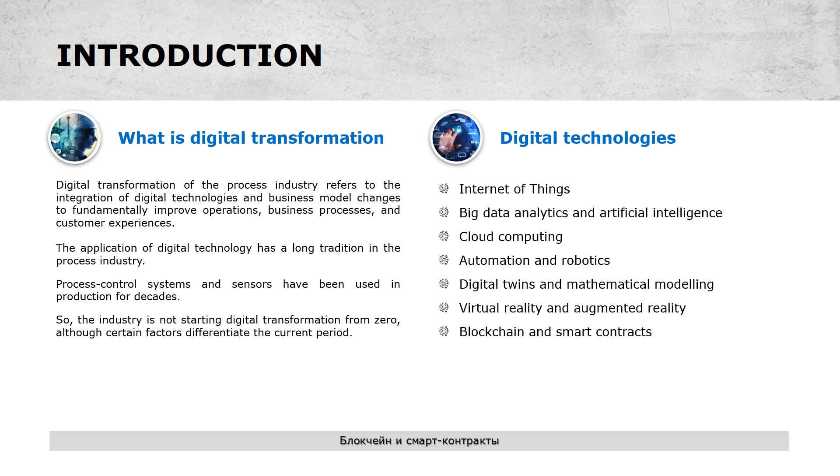Digital technologies: Internet of Things. The Internet of Things, IoT, is a set of sensors connected with a digital platform which are used to collect, transfer, and analyze raw data in real time to get a clear picture of processes at the facilities, improve operational efficiency, reduce energy consumption, and drive profitability.

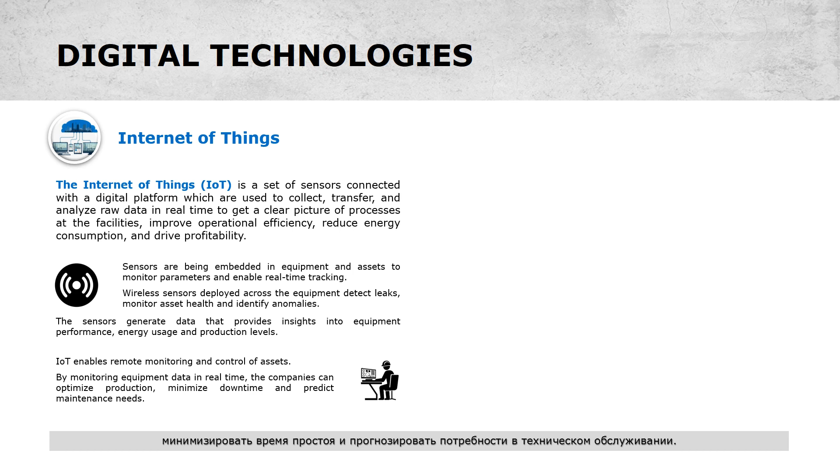Sensors are being embedded in equipment and assets to monitor parameters and enable real-time tracking. Wireless sensors deployed across the equipment detect leaks, monitor asset health, and identify anomalies. The sensors generate data that provides insights into equipment performance, energy usage, and production levels. IoT enables remote monitoring and control of assets. By monitoring equipment data in real time, companies can optimize production, minimize downtime, and predict maintenance needs.

Benefits of IoT. Real-time visibility: IoT provides a real-time view into equipment performance, safety, and environmental conditions, enabling companies to continuously monitor their facilities.

Predictive maintenance: the data from sensors installed at processing facilities enables predictive analytics and root cause analysis. They help identify pre-failure conditions and perform maintenance in advance to avoid major downtimes and ensure smooth operation and smarter utilization of assets.

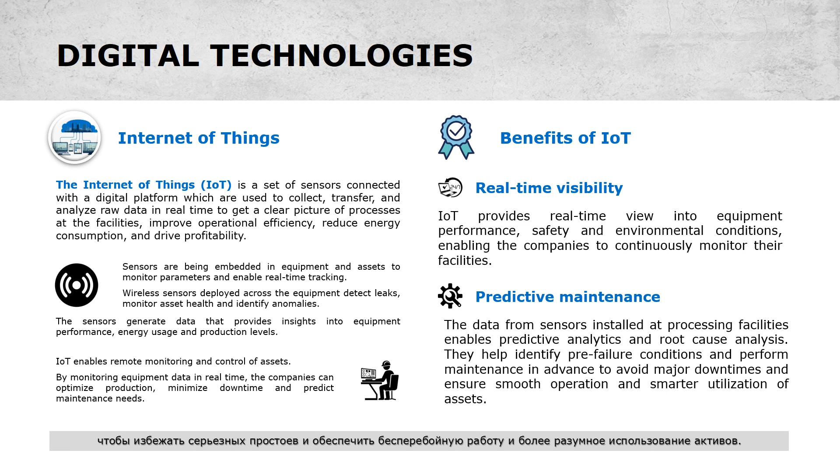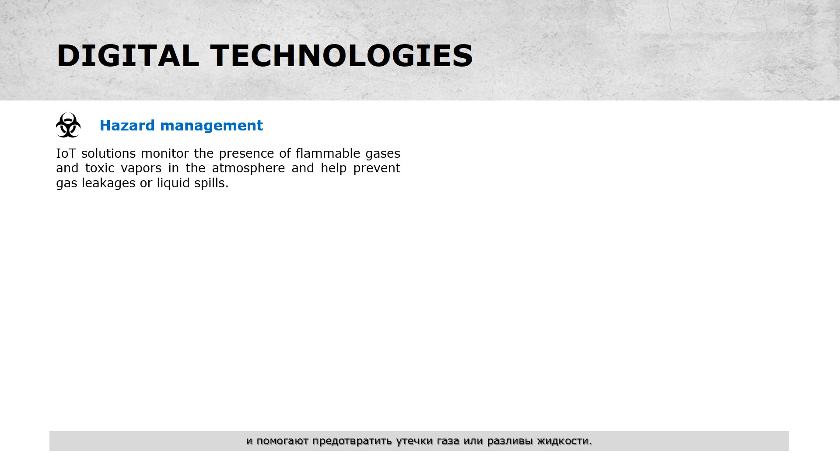Hazard management: IoT solutions monitor the presence of flammable gases and toxic vapors in the atmosphere and help prevent gas leakages or liquid spills. Accident prevention capabilities of IoT also make operations safer and reduce injury rates by enabling advanced workplace safety monitoring and instant danger alerts.

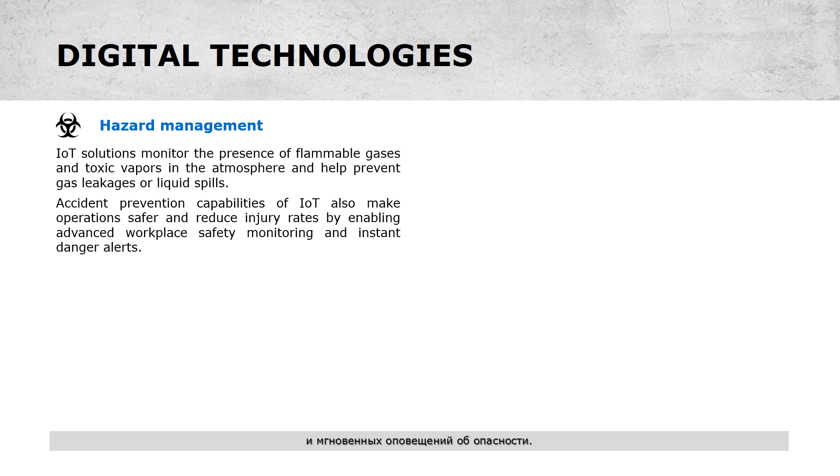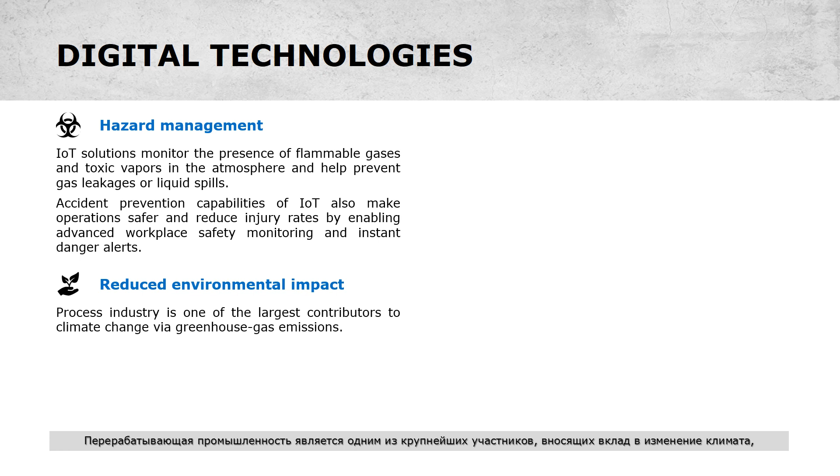Reduced environmental impact: the process industry is one of the largest contributors to climate change via greenhouse gas emissions. To reduce the environmental impact, operators can reduce fugitive emissions and flaring with the help of IoT-enabled leak detection and predictive maintenance.

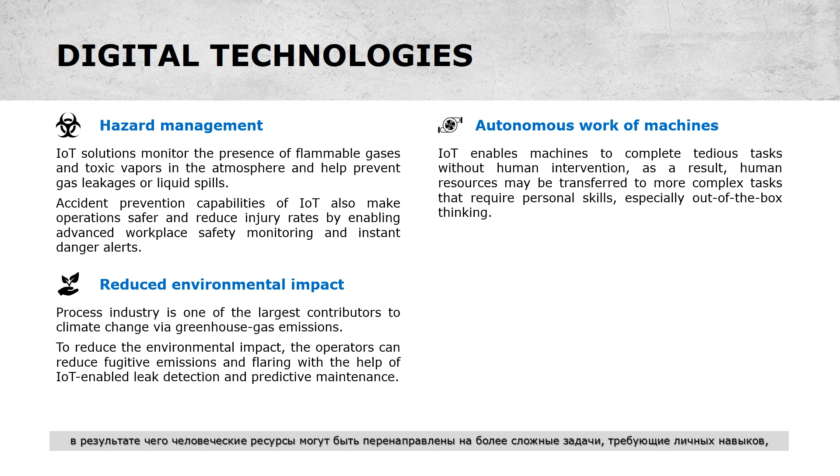Autonomous work of machines: IoT enables machines to complete tedious tasks without human intervention. As a result, human resources may be transferred to more complex tasks that require personal skills, especially out-of-the-box thinking. Companies can automate processes, reduce labor costs, and cut down on waste.

Increased overall profits: IoT solutions contribute to cost efficiency. By optimizing the use of facilities, equipment, resources, and workforce, IoT solutions provide companies increased productivity and reduced expenditures, thus increasing overall profits.

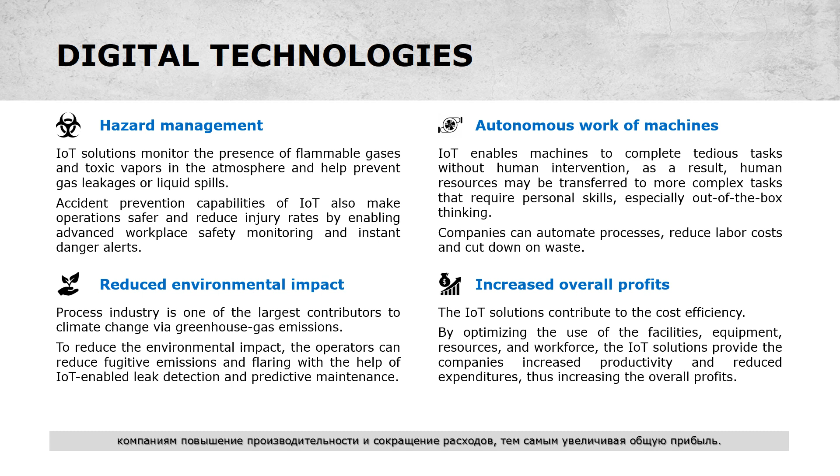Big data analytics and artificial intelligence: the vast amount of data generated by IoT devices and other sources has promoted the adoption of big data analytics and artificial intelligence technologies in the process industry. AI and machine learning algorithms are used to gain actionable insights from petabytes of data related to equipment performance, asset health, energy usage, etc. AI is also used for applications like autonomous drones for inspection, virtual assistants, and cybersecurity threat detection.

Advanced analytics helps optimize operations, improve efficiency, predict equipment failures, and detect anomalies.

Cloud computing plays an important role in enabling digital transformation in the process industry. The cloud provides scalable infrastructure for storage, processing, and analytics of data related to IoT sensor data, production data, etc. It allows sharing of data and insights across the value chain.

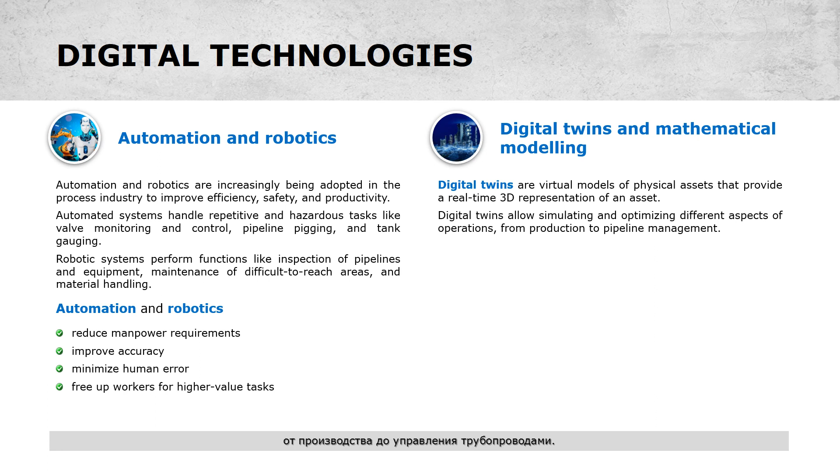Digital twins and mathematical modeling: digital twins are virtual models of physical assets that provide a real-time 3D representation of an asset. Digital twins allow simulating and optimizing different aspects of operations, from production to pipeline management. Digital twins have many applications in the process industry.

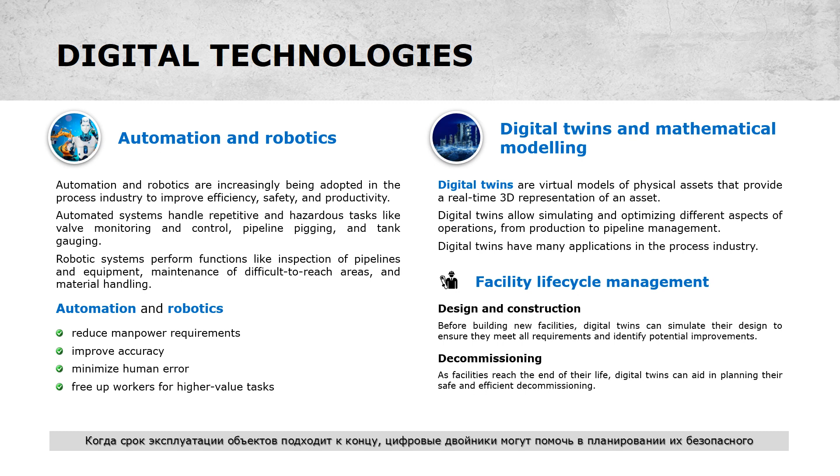Facility lifecycle management. Design and construction: before building new facilities, digital twins can simulate their design to ensure they meet all requirements and identify potential improvements. Decommissioning: as facilities reach the end of their life, digital twins can aid in planning their safe and efficient decommissioning.

Asset performance management. Predictive maintenance: using sensors and real-time data, digital twins can predict when equipment might fail. This helps companies fix problems before they happen, reducing downtime.

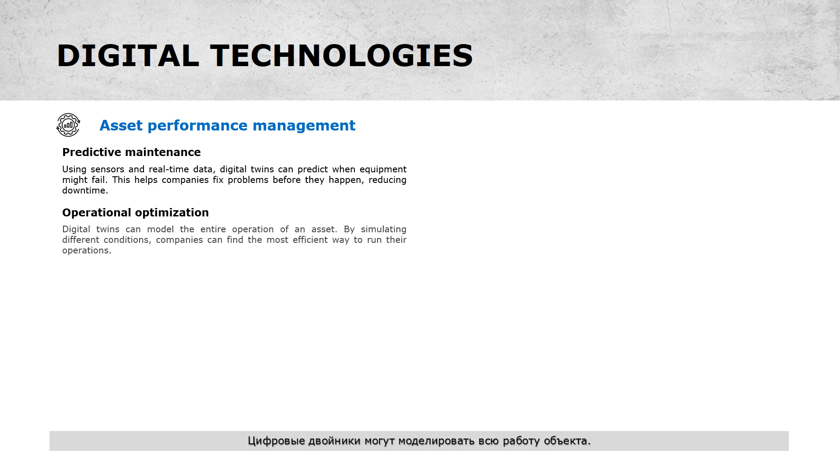Operational optimization: digital twins can model the entire operation of an asset. By simulating different conditions, companies can find the most efficient way to run their operations.

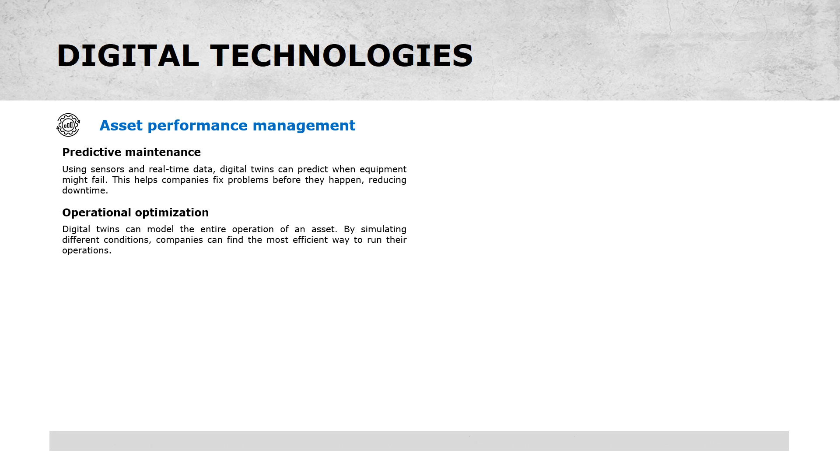Simulation of asset operation. Flow simulation. Digital twins model the flow through pipelines and other infrastructure. This can help identify bottlenecks or inefficiencies in the system. Yield maximization. Companies can simulate different conditions, like temperature or pressure, to find the optimal settings for maximum production.

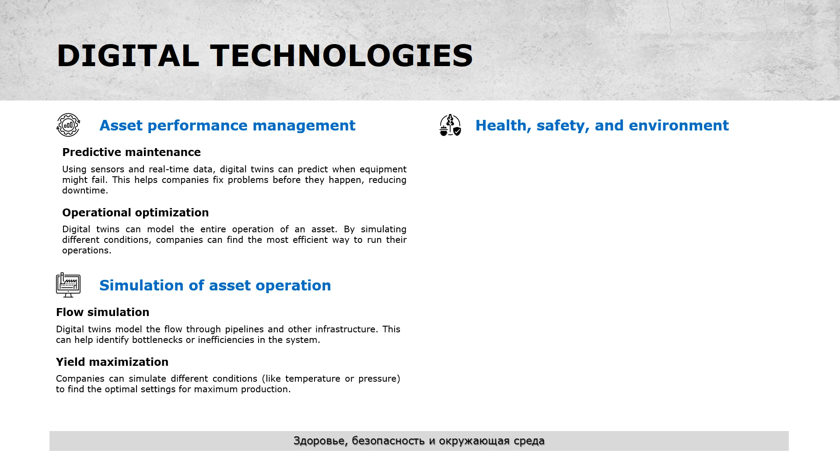Health, safety, and environment. Safety training. Digital twins can recreate emergency scenarios, for example, a fire, in a virtual environment. This allows workers to practice their response in a safe, controlled setting. Environmental monitoring. Digital twins can monitor emissions, wastewater, etc., in real time, ensuring companies meet regulatory standards and reduce their environmental impact.

Supply chain and logistics. Inventory management. Digital twins can track the storage, usage, and replenishment of parts or chemicals, optimizing inventory levels. Optimization of transportation. By modeling the transportation of flows, digital twins can find the most efficient routes and methods.

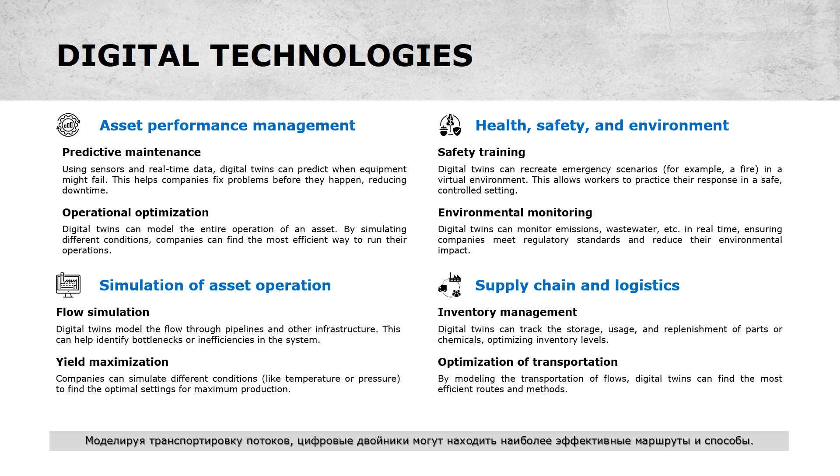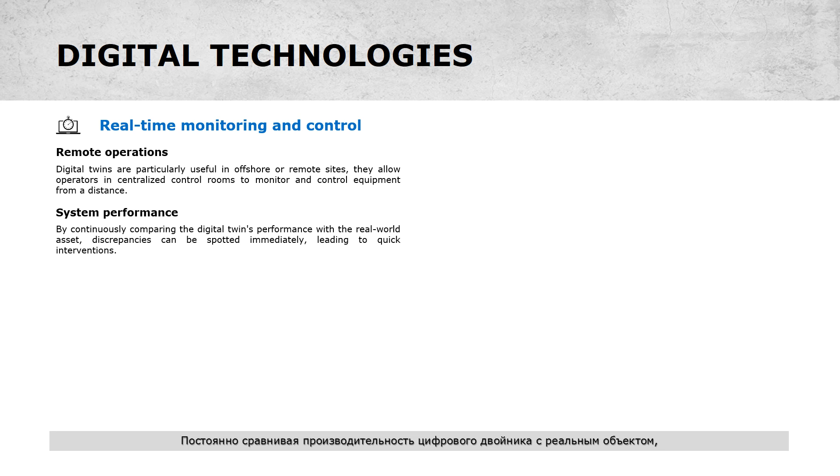Real-time monitoring and control. Remote operations. Digital twins are particularly useful in offshore or remote sites. They allow operators in centralized control rooms to monitor and control equipment from a distance. System performance. By continuously comparing the digital twin's performance with the real-world asset, discrepancies can be spotted immediately, leading to quick interventions.

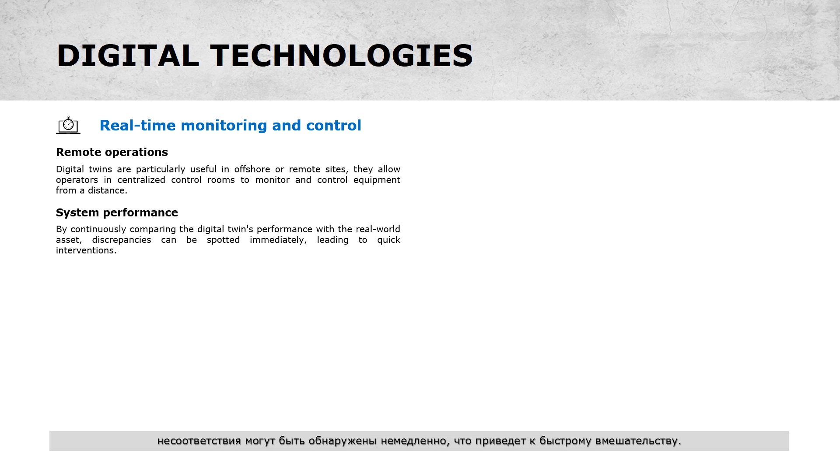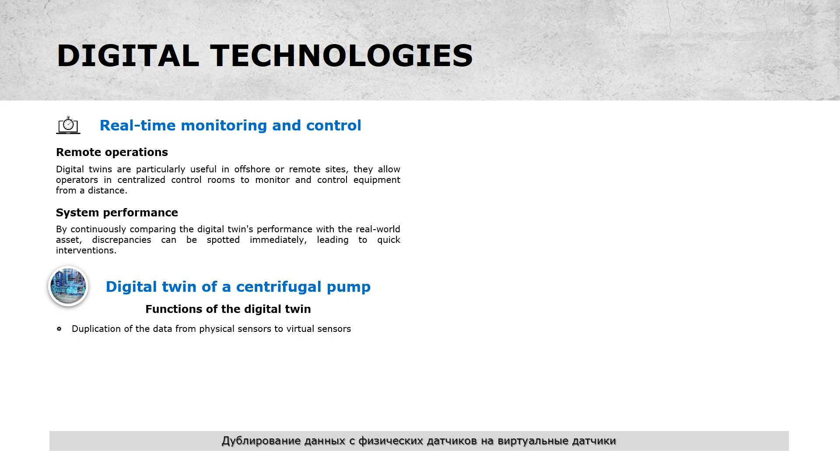Digital twin of a centrifugal pump. Functions of the digital twin. Duplication of the data from physical sensors to virtual sensors. Analytical calculation of the hydraulic characteristics of the pump based on the data of the mathematical model. Calculation of indicators of energy efficiency of the pump. Predicting the residual life of critical pump and motor parts based on regression methods to predict failures by the direct measurements of equipment operation parameters.

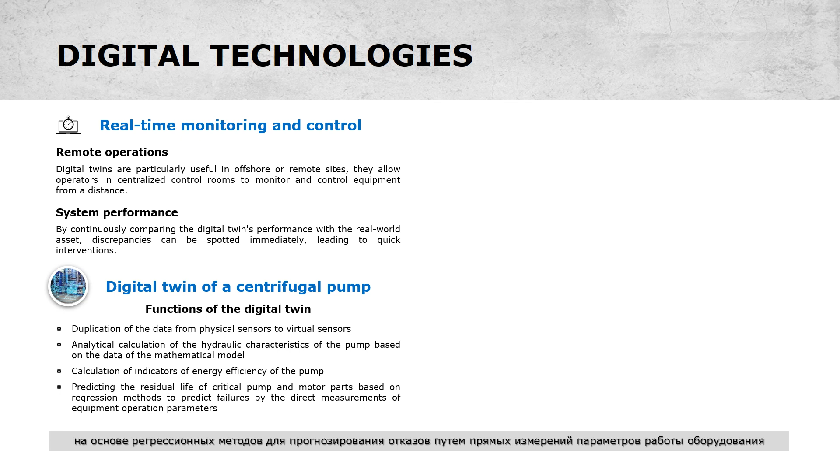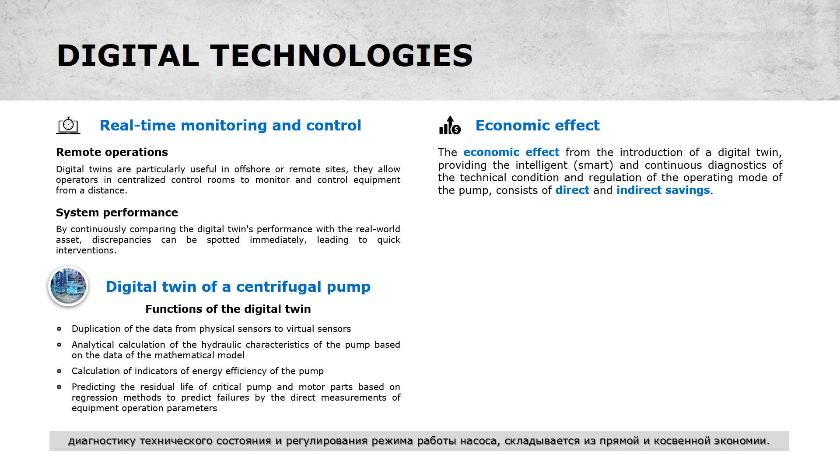Economic effect. The economic effect from the introduction of a digital twin, providing the intelligent, smart, and continuous diagnostics of the technical condition and regulation of the operating mode of the pump, consists of direct and indirect savings. Direct savings. Reduction of repair costs and increase in the time between repairs due to the reduction of unreasonable planned repairs and unplanned repairs due to failures. Reduction of energy costs, by regulating the operating mode of the pump based on the calculation of energy efficiency indicators.

Indirect savings. Reduction of losses resulting from unplanned downtime, for example, losses in the form of unearned income for the product shipment, lost profit. Reduction of the costs resulting from eliminating accidents that may arise due to equipment failures, and improving production safety.

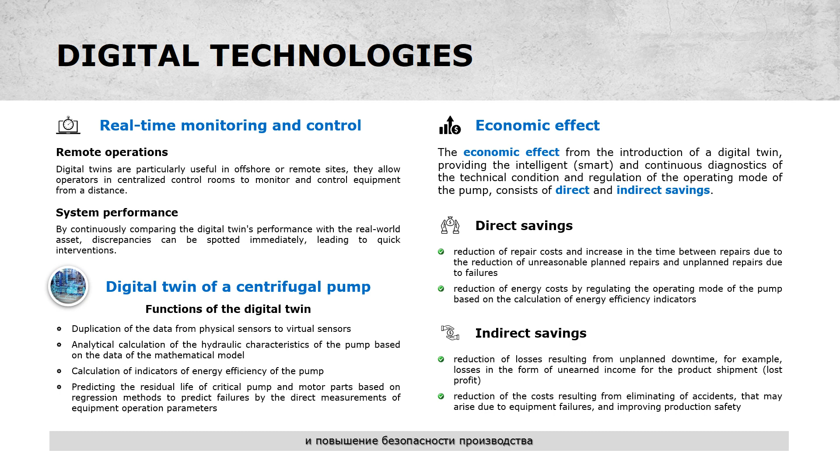Mathematical modeling is used because mathematical modeling is more economical than physical modeling and experimental research. Mathematical modeling is safer than physical modeling and experimental research. In other words, conducting a computational experiment using a mathematical model requires less material and time costs compared to physical modeling. In addition, when using mathematical models, the impact on the environment, health and safety of personnel is minimal.

The main task of mathematical modeling is to create a digital image of the object being studied, that is to obtain a mathematical description of an object in the form of mathematical expressions. This is necessary not only to imagine and study the object, but also to predict its behavior when the initial parameters change, and as a result, control the object.

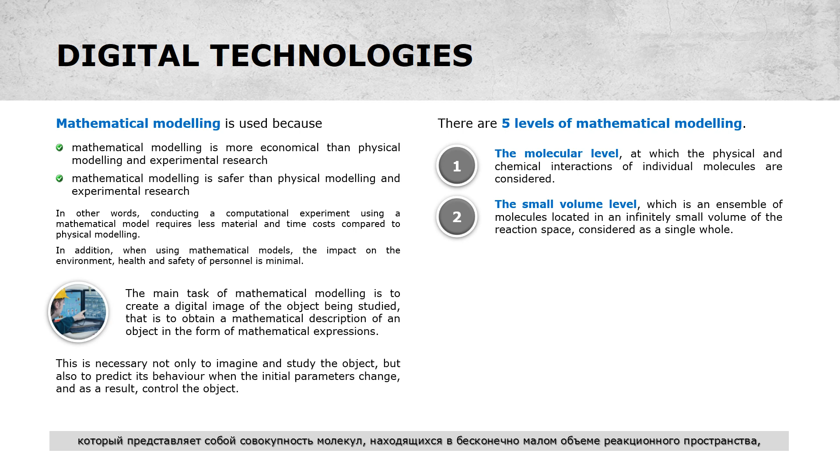There are 5 levels of mathematical modeling. The molecular level, at which the physical and chemical interactions of individual molecules are considered. The small volume level, which is an ensemble of molecules located in an infinitely small volume of the reaction space, considered as a single whole. The level of the working area of the apparatus, the object of study of which is individual areas of the working space of the apparatus. The level of the apparatus, at which the operation of the apparatus as a whole is modeled. The level of the system, modeling of the interconnected operation of several devices.

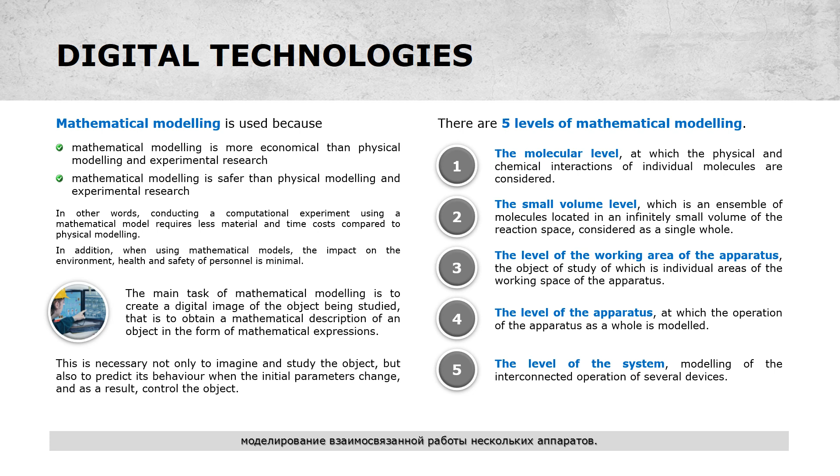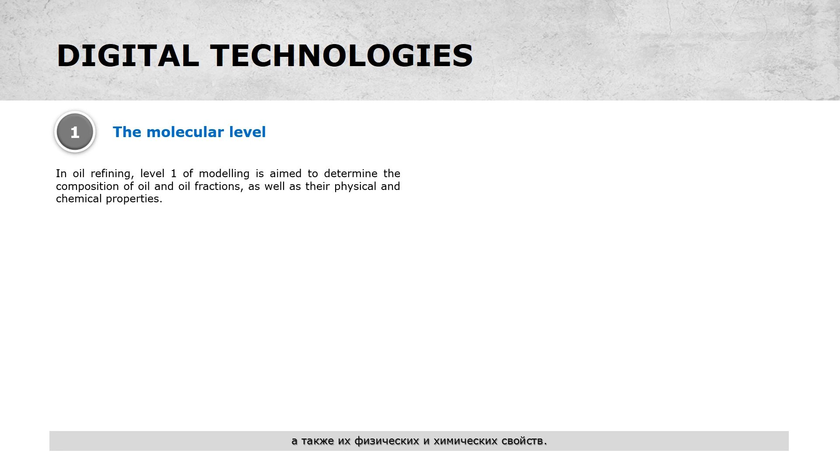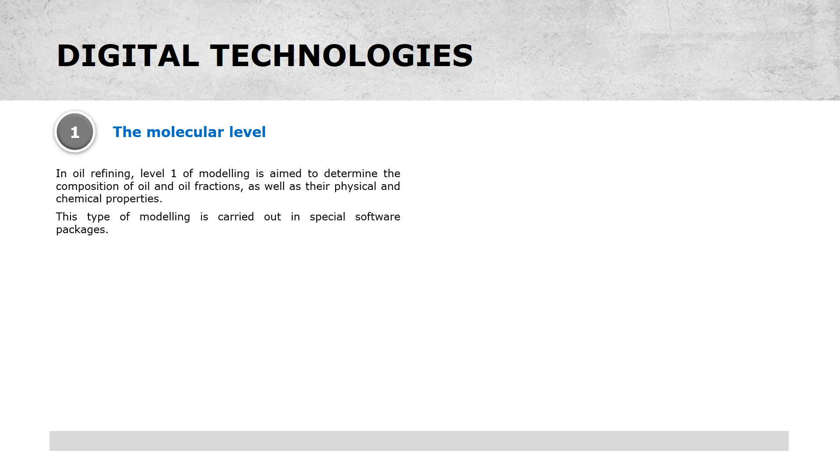The molecular level. In oil refining, Level 1 of modeling is aimed to determine the composition of oil and oil fractions, as well as their physical and chemical properties. This type of modeling is carried out in special software packages. They contain databases that include fairly complete information about the composition and properties of almost all oils from all fields in the world.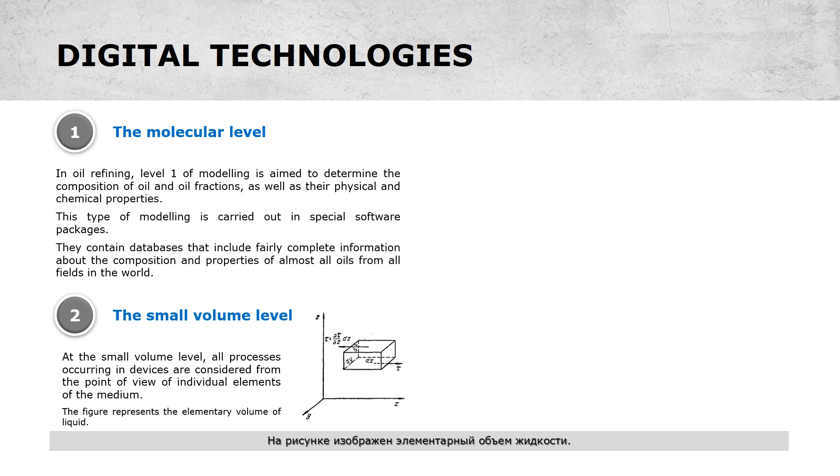The small volume level. At the small volume level, all processes occurring in devices are considered from the point of view of individual elements of the medium. The figure represents the elementary volume of liquid. Taking into account the action of all forces on an elementary volume of liquid allows deriving the system of fundamental Navier-Stokes equations. The left sides of the equations describe inertial forces arising in a moving fluid. The right sides of the equations describe gravity forces and frictional forces.

These equations are used to describe hydrodynamics, the movement of a fluid, in various processes. There are also similar differential equations for describing thermal and mass transfer processes. By integrating such systems, it is possible to obtain a complete mathematical description of all the phenomena under consideration. However, in most cases, solving such equations analytically is not possible.

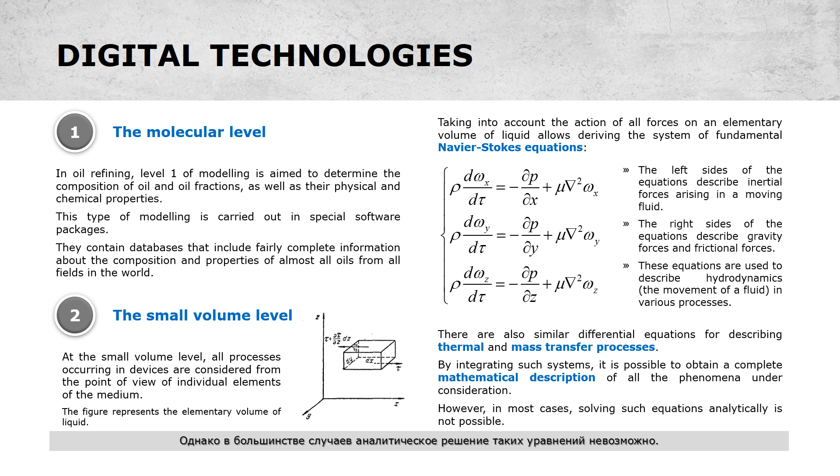Such problems can be solved using large computing power and various methods of computational mathematics implemented in specialized software packages, for example, ANSYS Fluent, OpenFOAM, etc. The initial data for modeling in this case are the properties of the media being studied, as well as the surface geometry and material characteristics. The result of the simulation is data on changes in the studied parameters at all points of the system. The use of programs allows obtaining a visual picture in the form of a video or static image.

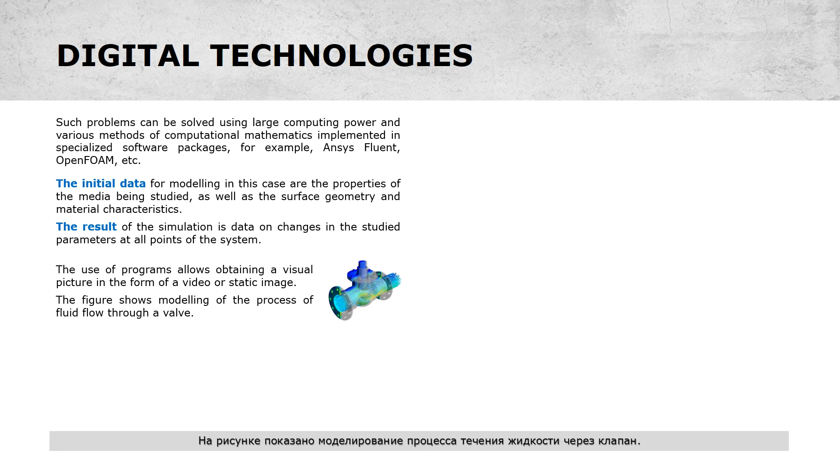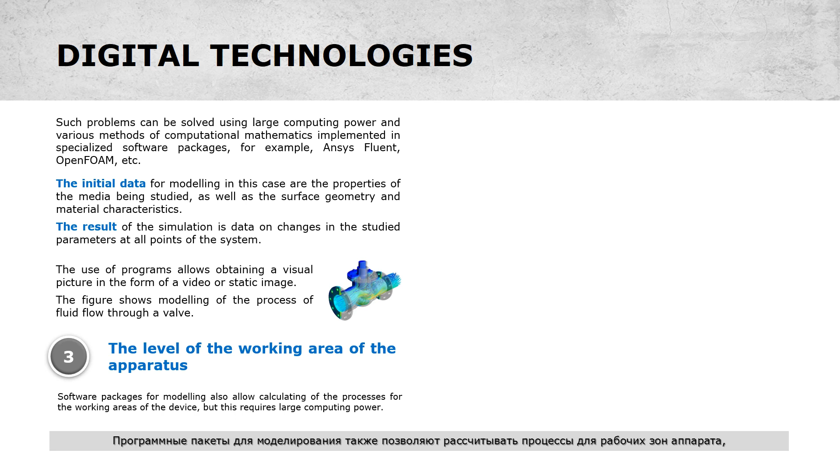The figure shows modeling of the process of fluid flow through a valve. The level of the working area of the apparatus. Software packages for modeling also allow calculating of the processes for the working areas of the device, but this requires large computing power.

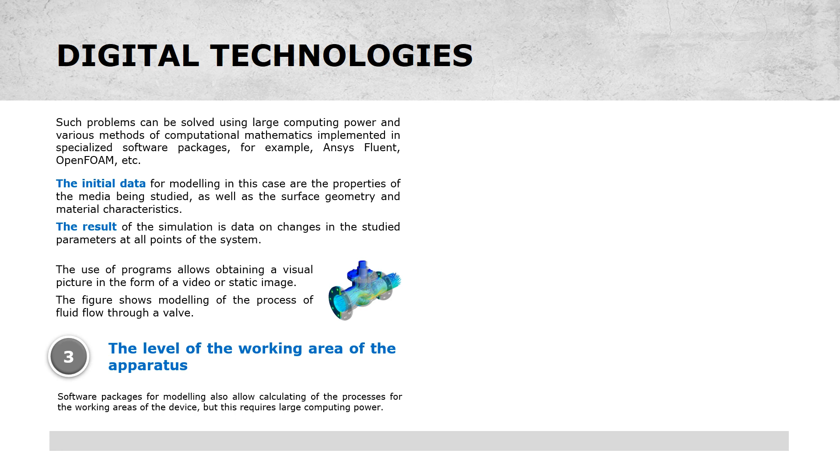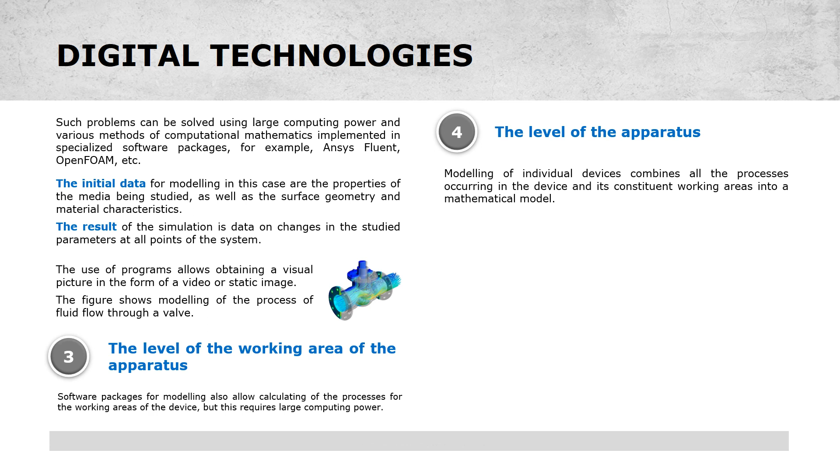The level of the apparatus. Modeling of individual devices combines all the processes occurring in the device and its constituent working areas into a mathematical model. The figure illustrates the modeling of pressure distribution during operation of a centrifugal pump. The result of such modeling is the generation of material and thermal balances of the device, determination of the optimal modes of its operation, and determination of its main characteristics.

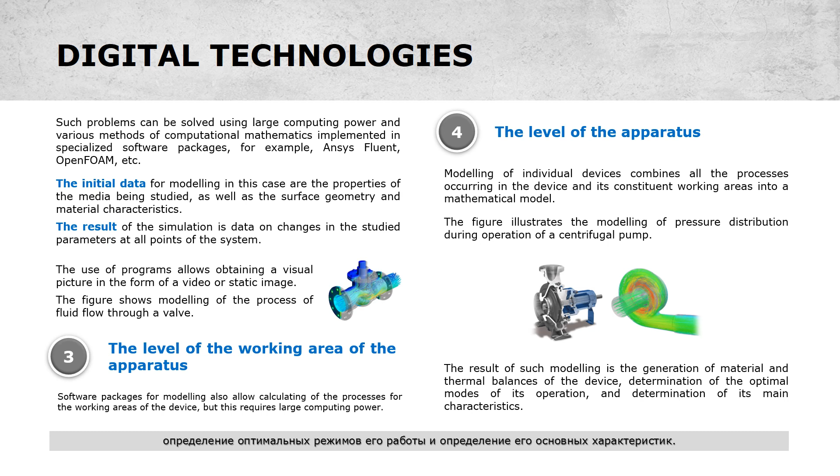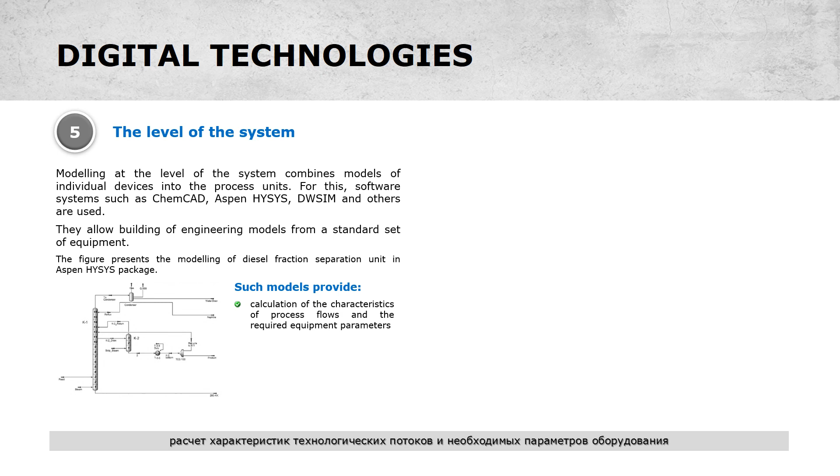Such models provide calculation of the characteristics of process flows and the required equipment parameters, selection of optimal operating modes for the entire unit as a whole system, prediction of the behavior of the unit when its operating conditions change, and carrying out of the intelligent control of the process.

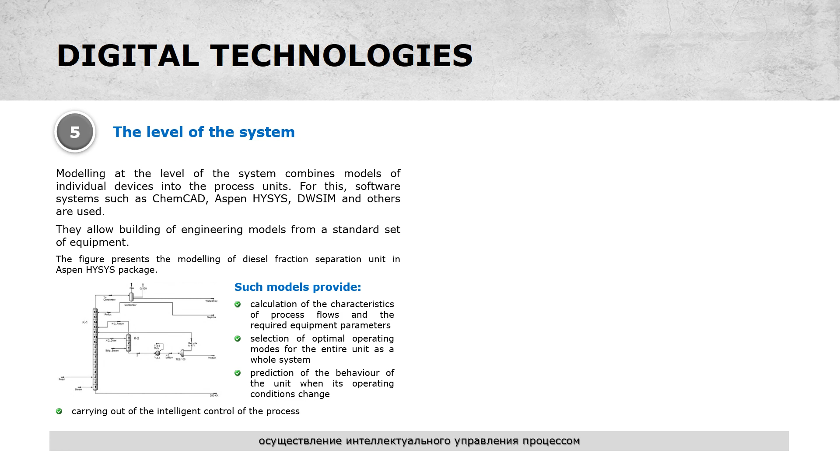There are also more global models that cover the entire production as a whole. They are the so-called LP models. They are built on the principles of linear programming, and, in fact, represent a set of tables of material balances, consumption rates of raw materials, reagents and energy resources of technological units. These models also take into account restrictions from the suppliers of raw materials and the consumers of products.

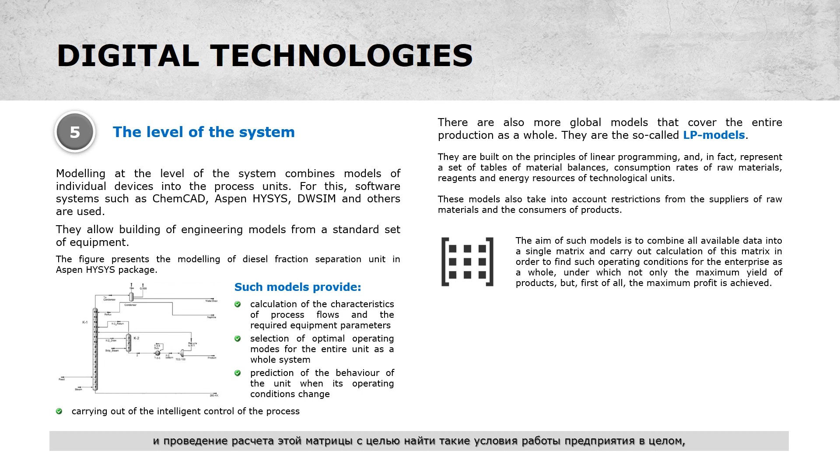The aim of such models is to combine all available data into a single matrix and carry out calculation of this matrix in order to find such operating conditions for the enterprise as a whole, under which not only the maximum yield of products, but, first of all, the maximum profit is achieved.

LP models solve economic problems, and they provide calculation of profits taking into account costs and restrictions from the suppliers and consumers, determination of the optimal set of products for manufacturing, economical evaluation of the impact of unit operating modes on the entire production, and creation of the business plan for production.

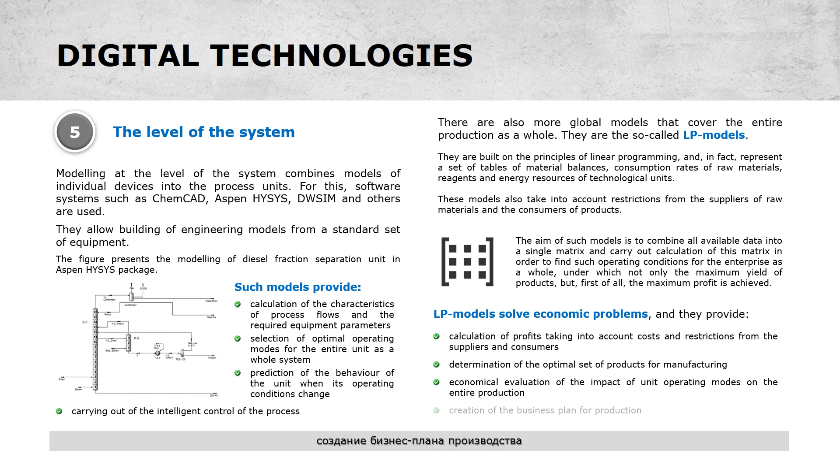Virtual reality and augmented reality. One of the main applications of VR and AR in the process industry is staff training. The process industry always needs experienced workers. However, training workers on site is an expensive and dangerous process. This problem can be solved using the VR technology. VR headsets can provide workers with practical training without the need to visit the plants.

Predictive maintenance is another application of VR and AR tools. AR headsets can significantly improve maintenance efficiency by providing graphical information and step-by-step instructions.

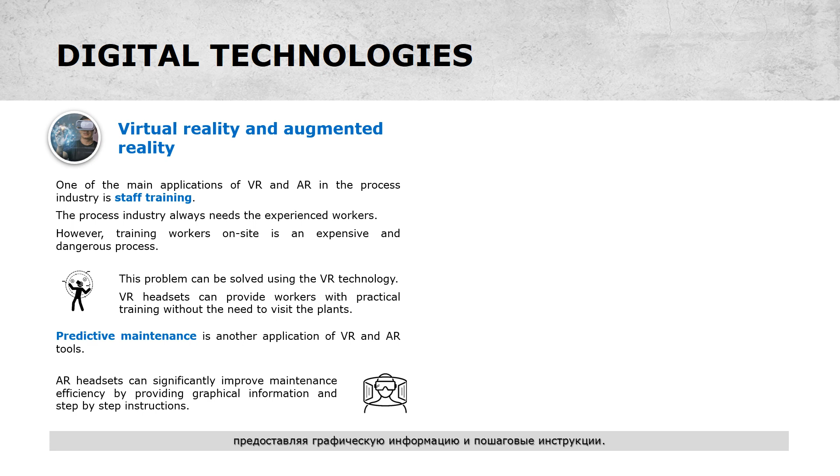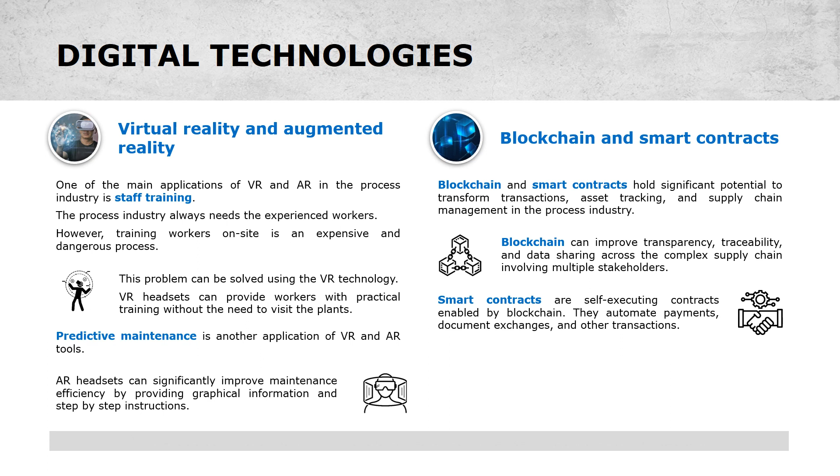Blockchain and smart contracts. Blockchain and smart contracts hold significant potential to transform transactions, asset tracking, and supply chain management in the process industry. Blockchain can improve transparency, traceability, and data sharing across the complex supply chain involving multiple stakeholders. Smart contracts are self-executing contracts enabled by blockchain. They automate payments, document exchanges, and other transactions.

The industry uses blockchain and smart contracts for applications like trading energy commodities, tracking crude oil from wellhead to refinery, digitizing contracts, and managing financial settlements and royalty payments.

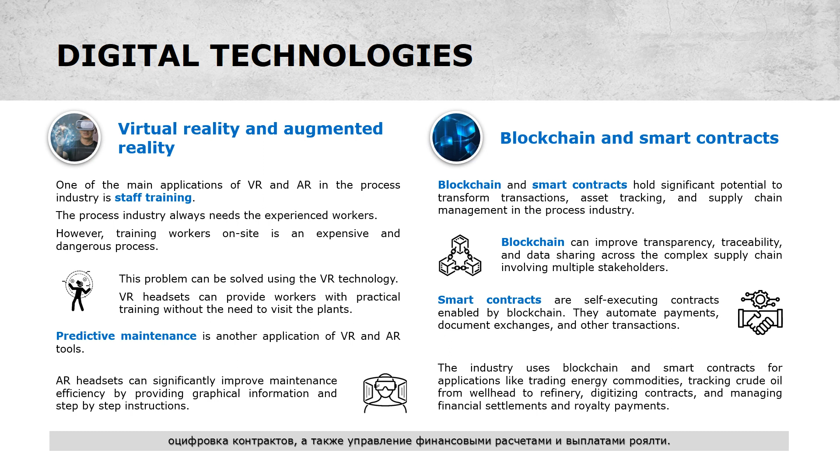Digital technologies. Internet of Things. Big data analytics and artificial intelligence. Cloud computing. Automation and robotics. Digital twins and mathematical modeling. Virtual reality and augmented reality. Blockchain and smart contracts.

The benefits of digital transformation. Digital transformation powered by digital technologies has the potential to revolutionize every aspect of the process industry. By leveraging data insights, optimizing and streamlining processes, digital technologies can help companies improve efficiency, enhance safety and sustainability, reduce costs, and increase overall profit.

Revision. Explain what is digital transformation. What digital technologies are used in the process industry? Explain what is the Internet of Things. List the applications and benefits of the Internet of Things. What algorithms are used for big data analytics? List the applications and benefits of the advanced analytics. List the applications and benefits of the cloud technologies.